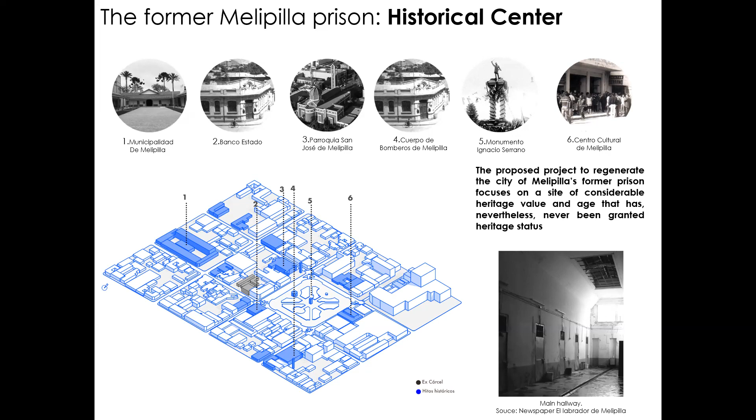Furthermore, the use of digital design tools has enabled the evaluation and specification of various project alternatives, simulating suitable environmental conditions for its proposed uses and empowering the implementation of minimum impact interventions with the help of existing automation technologies.

Abandoned prisons are urban landmarks that bear a heavy historic and social burden and leave a mark on the community. Former prisons can be found in the historical city centers. With the passage of time and urban expansion, new confinement facilities have been created on the outskirts of populated areas. This gradual transition to new infrastructure has left behind old, now disused prisons in the heart of many cities.

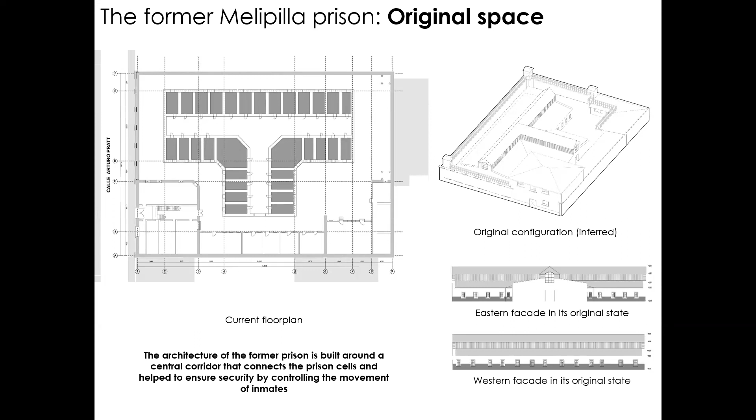The architecture of the former prison is typical of others of its type. It is a building around a central corridor that connects the prison cells and helps to ensure security by controlling the movement of inmates. The history of the building has 3 stages.

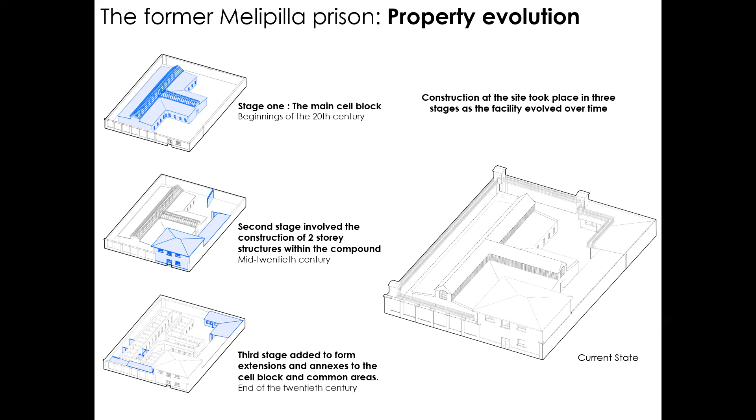Stage 1 consisted of the main cell block. The walls are built in handmade bricks using the English bond technique. The second stage was added to the prison in the mid-20th century and involved the construction of 2-story structures within the compound. The third stage, implemented at the end of the 20th century, consisted of lightweight materials added to form extensions and annexes to the cell block and common areas.

Melipilla currently has a small library in the City Council building. However, the room was not designed for this purpose. A new city library would bring considerable benefit and provide a new cultural space for the local community.

The project would help to preserve one of the city's historical buildings, to promote its heritage value by opening it to the public, even if it's not yet safeguarded as a monument.

The existing building will be renovated and spaces will be connected in order to convert the old prison cells into reading rooms. The original spatial configuration of some of the cells will be left intact. Others will be modified and joined together in order to open up the space and adapt the building to its new function.

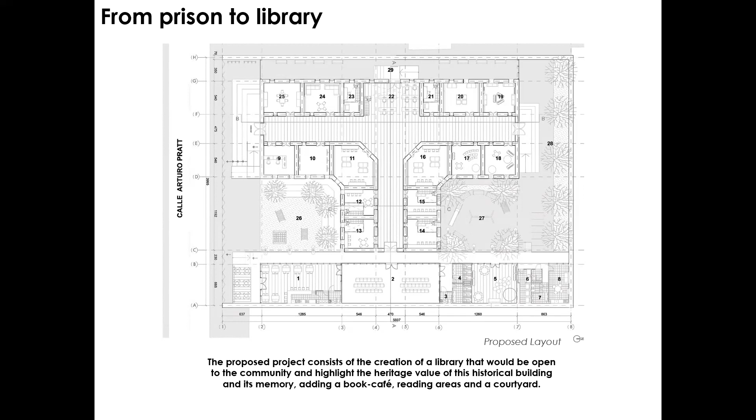The project involves the following intervention criteria: respect, authenticity, functionality.

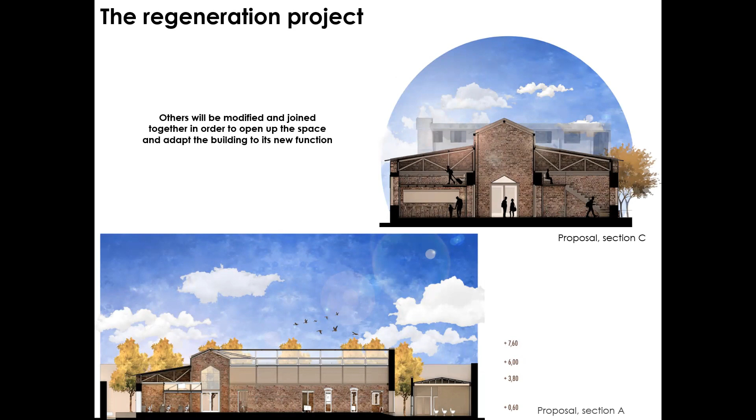Respect: the project respects the historic building, emphasizing the original materials and the traces of history. The structure is adapted to its new function while maintaining its original corridors and preserving some of the old prison cells as testimony of the past.

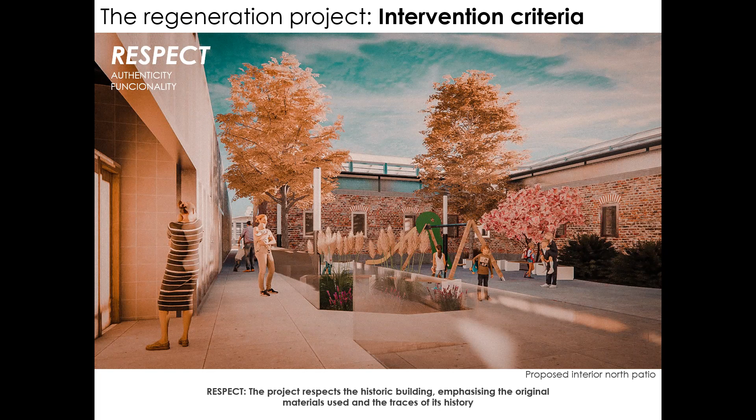Authenticity: a key objective of the project is to preserve the historic fabric of the building, carrying out respectful and restrained interventions. Annexes and extensions that are not in keeping with the original structure will be demolished in order to focus attention on the old cell block.

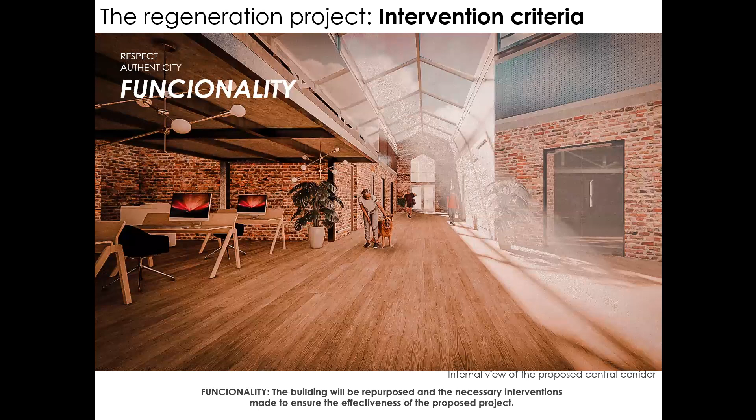Functionality: the building will be repurposed and the necessary interventions made to ensure the effectiveness of the proposed project. Certain closed-off areas are to be opened up and spaces joined in order to adapt the building to its new function. The original fabric remains in evidence and the memory of the site is preserved.

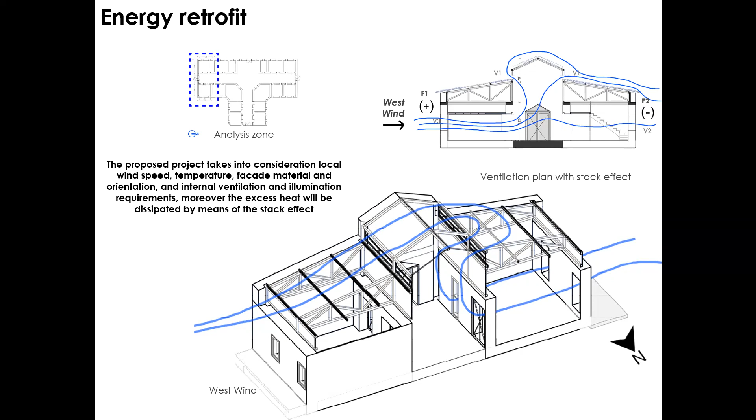Refurbishment of the former prison building will include the implementation of passive ventilation in order to maximize energy efficiency and adapt the various spaces to the new function. The proposed project takes into consideration local wind speed, temperature, facade material and orientation, and internal ventilation and illumination requirements. Moreover, excess heat will be dissipated by means of the stack effect.

The proposal involves covering the old central corridor with a translucent roof to allow the passage of light. The addition of a solar control film will prevent glare during the most intense hours of sunlight. This technology helps reduce radiation and heat, filtering excess light and ensuring that the corridor remains comfortable.

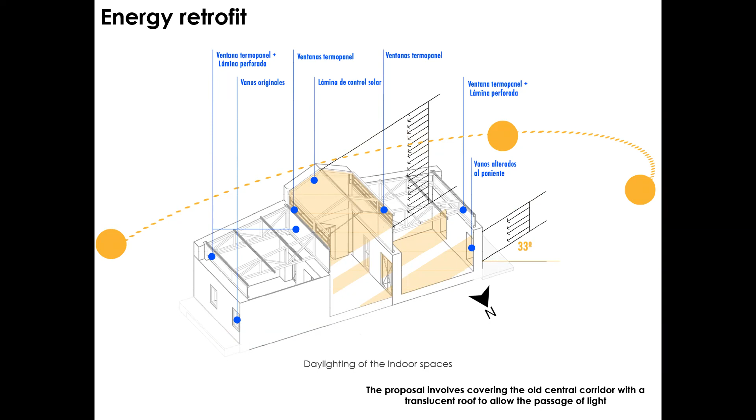The old prison cells will become reading rooms and study areas. All rooms will be shaded from excessive light streaming in through the roof by means of a perforated latticework that will filter the light as it enters from the corridor.

In order to achieve thermal comfort during winter, an analysis was made of those parts of the building most susceptible to energy loss. Double-glazed windows will be installed in the original openings and in the gap between the roof and the original walls. To control excessive solar gain during summer, the windows in the central corridor will open automatically to enable the stack effect to exhaust heat from the building, ensuring thermal comfort inside.

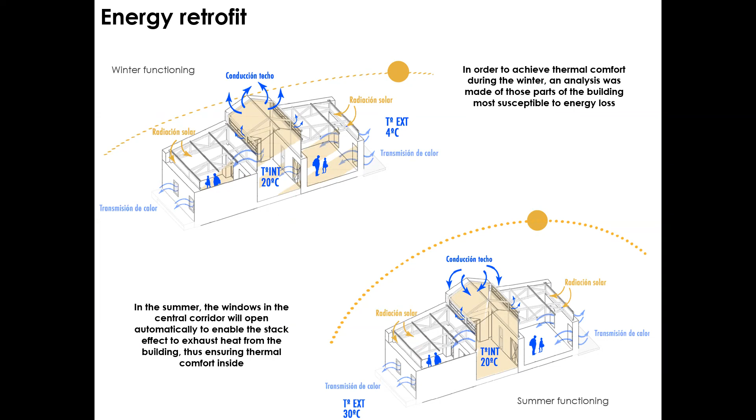The proposed building renovation system maximizes the comfort of the library users while minimizing energy use through passive solutions, in order to maximize the building's sustainability.

The ability to monitor various parameters of buildings for public use allows for maximum sustainability and, as an additional benefit, users' comfort. One of the most popular approaches today uses the technology provided by the Internet of Things to collect and organize information about the state of the building, known in the scientific literature as a digital twin.

From an Internet of Things perspective, building automation involves using connected devices and sensors to automate and optimize the operation of various systems within a building. These systems may include lighting, heating, ventilation, air conditioning, security, and energy management. By integrating these systems and leveraging data collected from sensors and devices, building managers can gain insights into the building's performance and make data-driven decisions to improve efficiency, comfort, and safety.

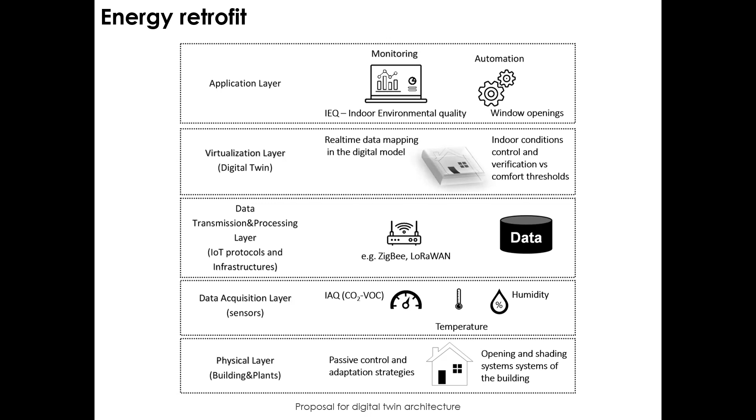The renovation of Melipilla prison, passing from a prison to a library, necessitates careful planning. A successful renovation can create a space that is both functional and respectful of history. The following are the most critical findings of the Melipilla Historic Building renovation from prison to library: structural issues, historical significance, safety and accessibility, community engagement, and elements of design.

The design of a building, the design of a library, is important for creating a welcoming and functional space for visitors. We need to consider how to use the existing space in a way that maximizes natural light and creates a comfortable environment for reading and studying when converting a prison into a library.